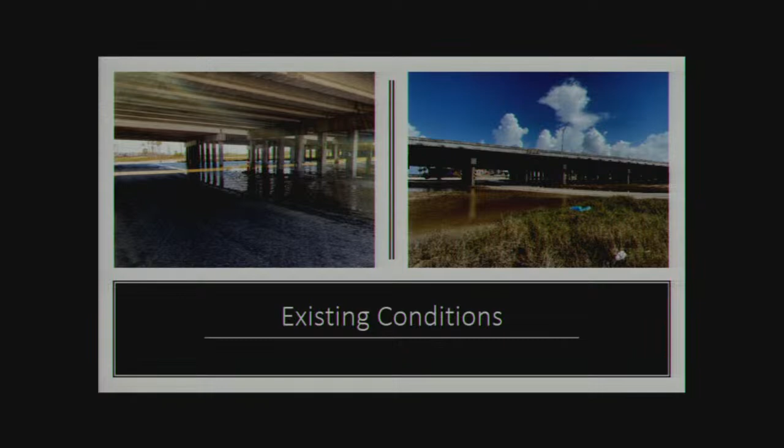While this is a TxDOT project, the city's Public Works Department is monitoring it closely. We're in touch with TxDOT because we want to make sure they get it done soon, given this long outstanding condition.

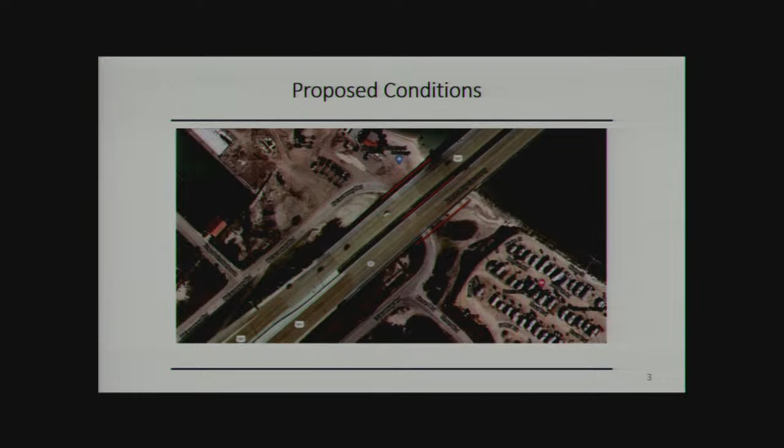Now, right across that roadway is what we all know as La Vista, well, Lighthouse Point is the new name. It's a $25 million multifamily community, and we're going to show some video here while I talk through this.

There'll be 159 luxury apartments there. Many are already built, and some are actually filled with tenants at this point. There are 8 townhomes, a marina, a restaurant, a chapel, and a banquet hall, and the signature Fraser Lighthouse that will be a landmark entrance into our city.

That footage is pretty phenomenal. Lynn Fraser has taken this drone footage through the construction period, but you can see the project is nearing completion. It started in July 2019, and it'll be done by June of this year.

It's a $25 million project, and the lighthouse we may see a little footage of here was funded by the city at a cost of $625,000 from Type B funds. The lighthouse is going to be 135 feet tall from sea level, constructed from nearly 2,000 tons of stone sourced from Granbury, Texas. That height of 135 feet will make it the tallest lighthouse in Texas and the tallest stone lighthouse in the United States. So we're going to have some signature highlights with that lighthouse.

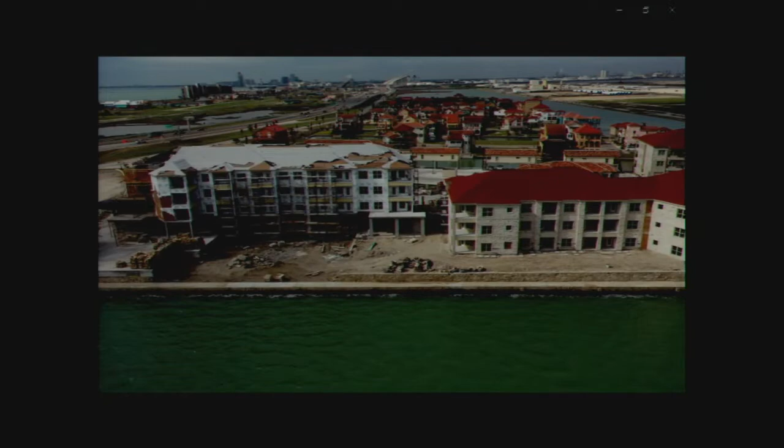50 apartments have been completed so far on this development, and residents have begun to move into the complex. Earlier this month, Councilman Lerma and several other council members were there to see the progress of the lighthouse, along with several other members of the community.

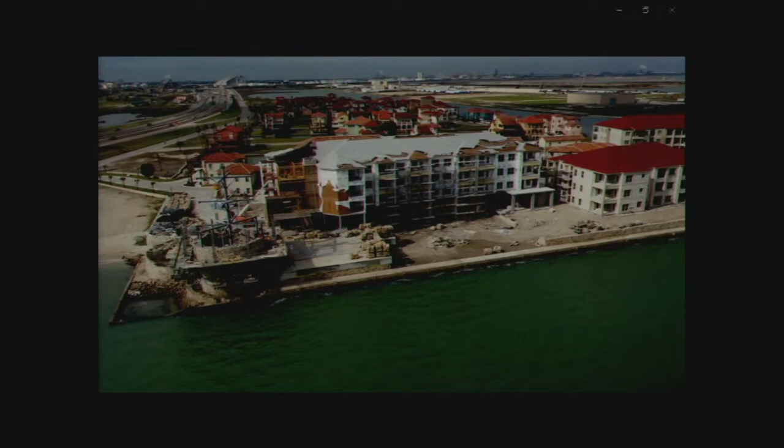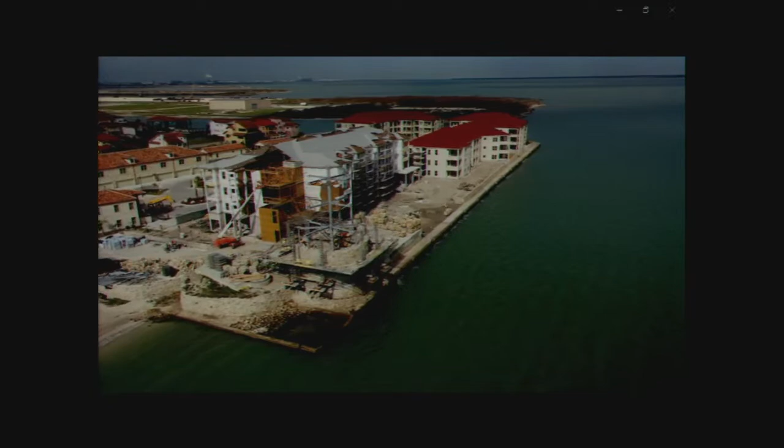We're going to transition now a little further north on the peninsula, close to the Texas State Aquarium, to talk about the North Beach restroom, parking, and playground facility. This is a $2.5 million project that the voters approved as part of the 2020 bond program, and we have some slides to show.

About 2 years ago, they were boarded up and pretty much shut down. We put some minimal investment in there, knowing we'd have an item in the bond program, to have running water and appropriate commodes and so on. With the new paint job and everything, they're okay for the next year until the new one is built.

They'll be demolished. One issue is that when you come in either way, the first thing you see is the restroom instead of the beach. We want to be able to see the beach and the ocean. So part of the program includes demolishing these 2 restrooms and building a brand new one that will be elevated to meet the velocity zone.

Also here is a playground, and we're going to show you a design schematic of how we want to bring that closer to the beach. So you have kind of a 2-for-1: families can enjoy the beach, but they could also get off the beach slightly and enjoy a playground with picnic tables and barbecue pits. The restrooms will be right here.

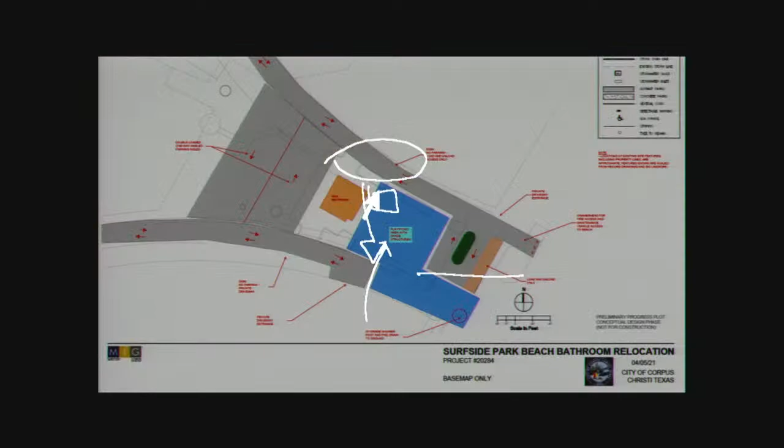We're going to show you the next slide. This is tentative, and we've worked with Carrie Myers and the North Beach Neighborhood Association. It's not finalized, but it does include input from Carrie, Neiman Young, and myself. I spent over an hour with Carrie on site a couple of weeks ago, and we've been sending her various schematics as we've evolved them, so she can share them with the community.

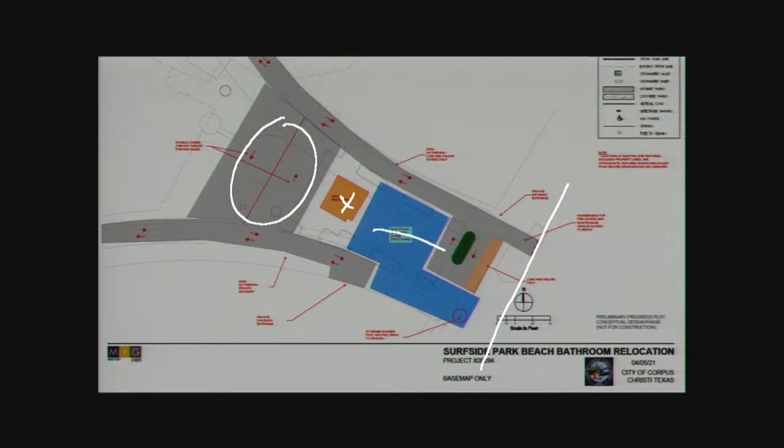You can see this is the beach over here, and the new restroom location would be here, with new parking up here, away from pedestrian activity, so people feel safe walking from the playground to the beach. The blue area would be the playground—we'd take it from where it is today and move it here so you have access to the beach and can use the playground and/or the beach almost simultaneously or one after the other. This is the new restroom location—not on the beach, but not too far away either.

You'd have both roads remain open with 2-way traffic, and down here, persons could drop off individuals—maybe young children or people with disabilities—and then progress back out to the parking lot. So that's the current schematic. I don't know if there's another slide on that one.

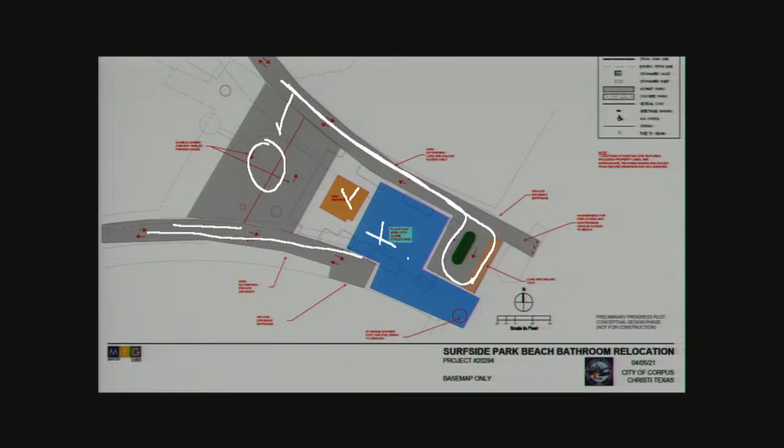Here's the design of the new restroom facility, and Carrie and the community, as well as the city, are happy with it. You can see it's elevated. The bottom level will have the required velocity zone breakaway material, but it will be closed up, so there won't be a place for hanging out, vagrants, or snakes.

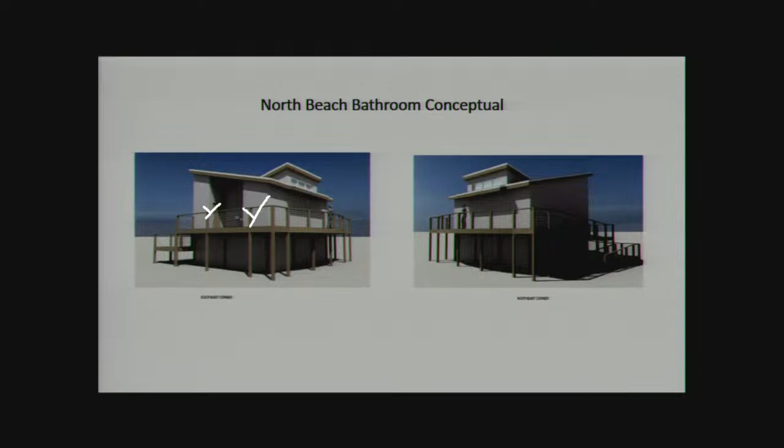Here are the doors for the men and women's restroom. It's an open floor plan, which is something the community wanted. Today, restrooms have individual stalls with a private door, and that can lead to some behavior that we don't want on North Beach or anywhere.

So the floor plan includes an open layout with stalls and sinks. Our design firm, MIG, which has national experience, is recommending context-sensitive materials rather than traditional plastic playground equipment. These are just examples of what's contextually relevant.

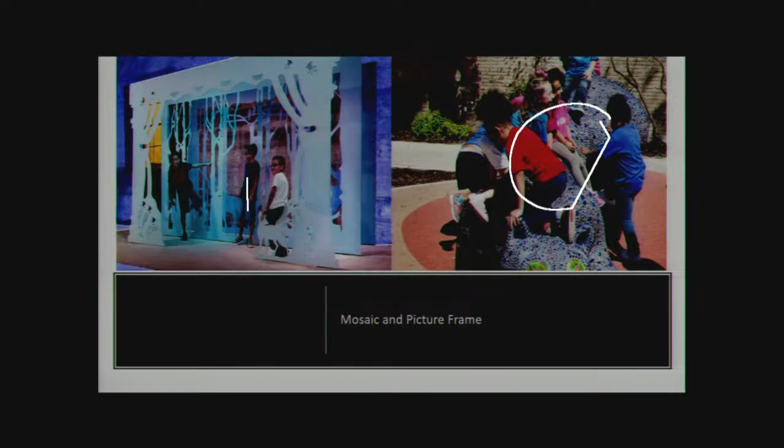This is an example of what could be there to let children use their imagination and play while they're on the beach. The playground would have seating and barbecue pits as well, offering a nice addition to what's there today.

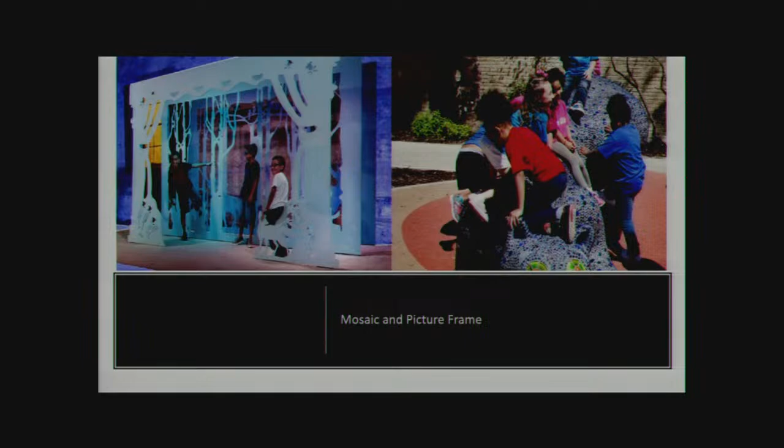This Friday, Neiman is going to meet with Carrie Meyer to show the final design sketch we have to date, and hopefully we'll reach a conclusion. Then we'll have MIG finalize their pre-design. We brought this firm on early to fast-track this project, which isn't unusual lately—we're trying to get things done as quick as we can.

MIG is doing preliminary design. Once they're done with their final design work, we'll do a design bid for this item. We expect to advertise for the design bid in mid-May of this year, and hopefully the facility will be done probably within the next year. It's not that big of a project.

So those are 4 projects: the drainage solution we're working on at North Beach, the 181 turnaround drainage solution; an update on the multifamily community coming up, the $25 million community; and the restroom and parking lot, which is the 4th item. We're going to have Tom Schmidt finish out the update on North Beach and talk about the progress of the Texas State Aquarium.

But before he speaks, I'd like Councilman Lerma to say a few words. He and I spoke yesterday, and he said let me have you close out my portion before Tom Schmidt comes up to talk. So, Councilman Lerma.

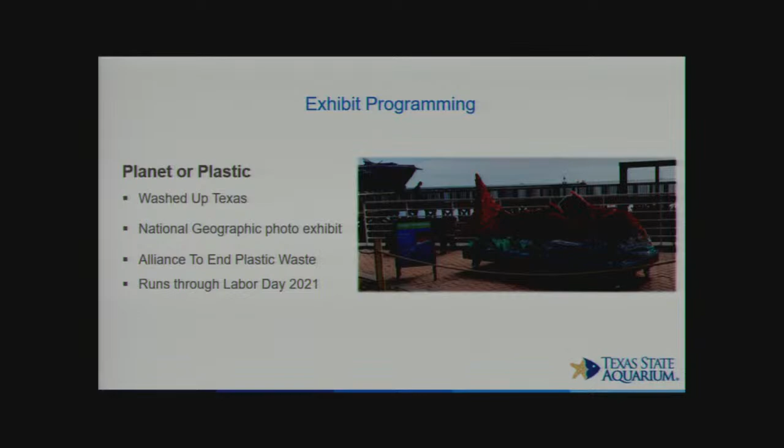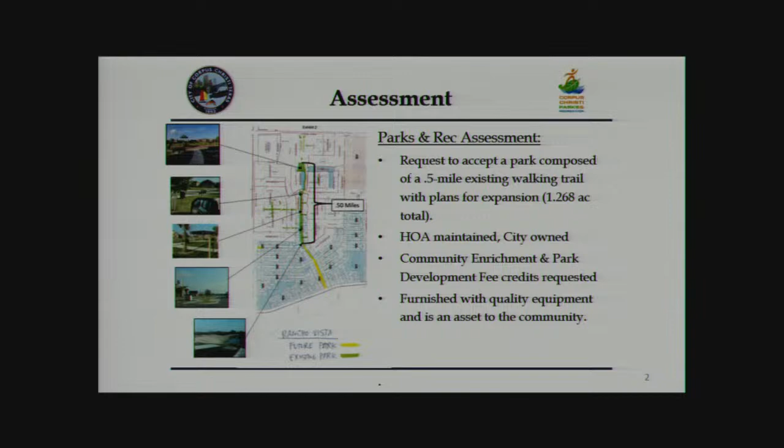As you can see here, this area has a playground, seating area, and a bike rack.

It also has a covered seating area next to this pond. Here's a picture of the walking trail.

They have some really nice dog stations, some bulb outs for parking, so all can access this park. And here are some more seating areas along the route and some trash cans.

In summary, staff recommends approval of this agreement. I stand by for any questions.

I'd also like to point out the developers here with us today. Oh, there he is, on this side, right, if you have any specific questions about the development. Mr. Hernandez, do you have a question? Okay, Councilman Hernandez.

This was part of our tour on Friday, along with yourself and Mr. Young, and I also had a conversation with Mr. Brazelton about this via text. So I want to bring up, as well as with Al Raymond, one of those things I just want to make sure is clear.

The trail, the park we're talking about is fine, where they have the playground equipment, no issues there. But the part with the walking trail, I recall this was done in lieu of, or in conjunction with, the fact that there's no other sidewalks on either side of that median, or there's no streets. So I don't necessarily have a problem with how this is done, because it's done really nicely.

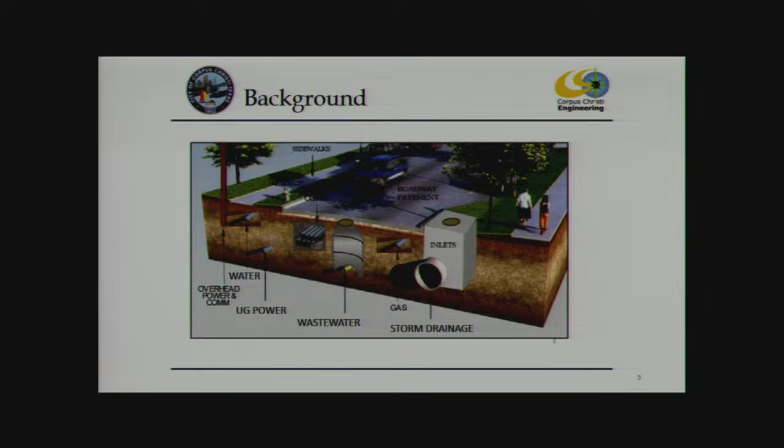You've got duct banks that carry conduit, conduits and duct banks for underground power, water, wastewater. Storm drainage is probably the largest piece of that infrastructure. You've got poles that have overhead utilities. And even with the complexity shown in this cross-section, there's a lot more you don't see because we're not illustrating the laterals that come from these utilities to serve the adjoining homes and businesses.

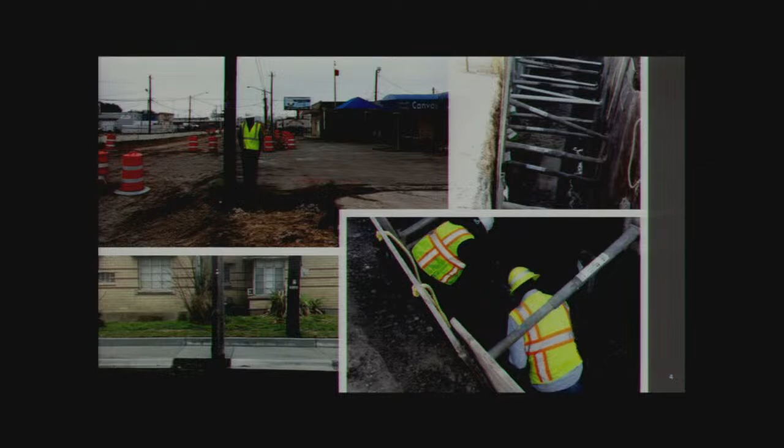These are some photos from recent construction projects that illustrate some of the problems we encounter. That first photo is one of our inspectors standing next to a utility pole that is in the alignment of the roadway and has to be relocated before we can complete the roadway. The guys in the trenches are working on a communication duct bank. The bottom left photo shows another utility pole that is in conflict with the location of the curb and gutter.

So we make a significant attempt to coordinate with these private utility companies. We distribute plans and specifications to them at every step of the design development process. We host quarterly coordination meetings to review upcoming projects and hear any issues they have. We also spend significant amounts of money to do subsurface utility engineering, where we try to get accurate XYZ locations on all of their utilities in the right-of-way and attempt to deconflict it at the design phase.

Our current ordinance also requires them to review and stay current on our capital improvement program. I'd say some of their efforts leave a little bit to be desired in that regard.

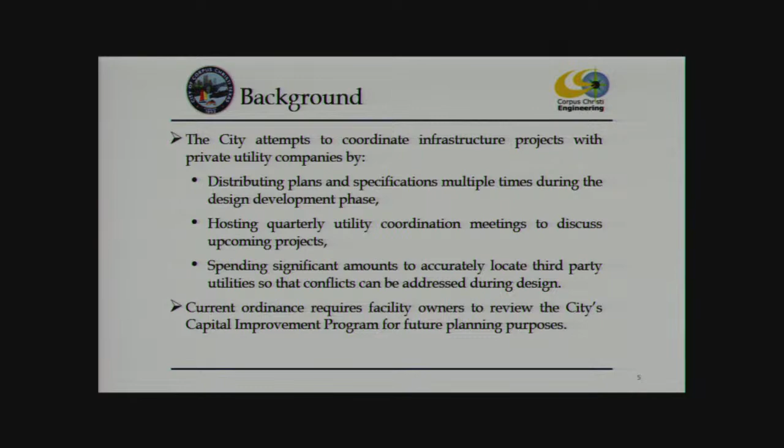So these are the problems we've experienced in recent years. Sometimes we send communication to somebody with the utility company, and they come up when we're getting ready to start construction or digging into their utility, and they say, oh, you've been sending all that stuff to the wrong person. I think it's their responsibility to maintain point of contact with us. But we've heard that a lot. We have design review meetings where they don't show up, which is fine, it's not mandatory, but if you're not engaging in the process, I'm expecting not to have problems downstream.

Sometimes we turn in these locate tickets—we do it during the design phase and during construction. That's the 811 call, which signals utilities that something is going to happen in a certain geographical area, and they have a responsibility to go out there and mark their facilities. That doesn't always occur. If you don't identify them during the design phase, it increases the likelihood that you'll have a conflict in the design that manifests itself during construction.

Utility relocation projects are not always programmed to coincide with our project schedule. We've heard utilities say, oh, that's not in our budget, we'll have to get to this next quarter or next fiscal year.

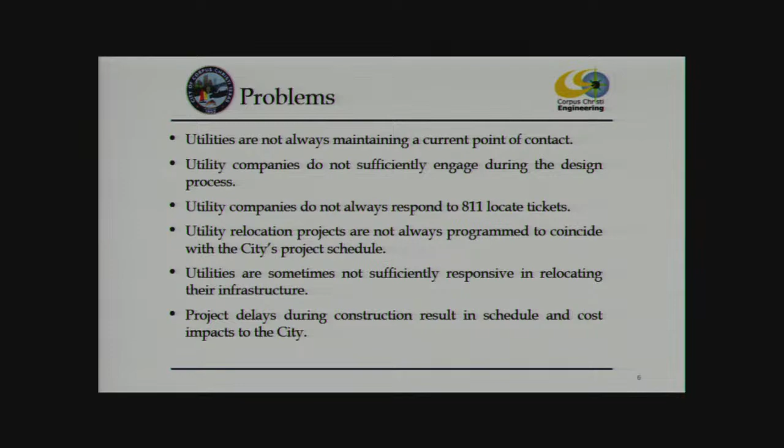As Jeff said, the purpose of the ordinance is to address some of these issues we're seeing during construction and design of our right-of-way projects. The ordinance requires the utility owners, the facility owners, to keep their contact information current with the city and to submit a schedule. So it amends section 49-43 of our existing code, requiring owners to relocate in a timely manner and submit a schedule to us. The new Article 8 puts timelines in place, setting expectations for the facility owners and the city on what the responsibilities of each party will be.

During the design phase, we notify facility owners at 30, 60, and 90 percent intervals of the design submissions, specs, and plans we get from our design engineer. We immediately send those to the facility owners so they can identify conflicts and let us know. If during the design process a conflict is discovered that cannot be designed around, or that we have not been requested to design around, we send notice to the facility owner.

They have 45 days at that point to submit a schedule to us, and then 120 days to relocate their facility. If after award of the construction contract the conflict is discovered, they have 5 days to submit a relocation schedule and 30 days to complete relocation.

The current ordinance, section 49-43, already has the penalty in there that's covered in 1-6 of our city code for penalties for unlawful behavior. What we did in this ordinance was consolidate it all into section 49-111 to make it easier to prosecute and to put the facility owners on notice so they don't have to go looking throughout the code and the Texas Penal Code to find the penalties. It's all right here in one section of the ordinance.

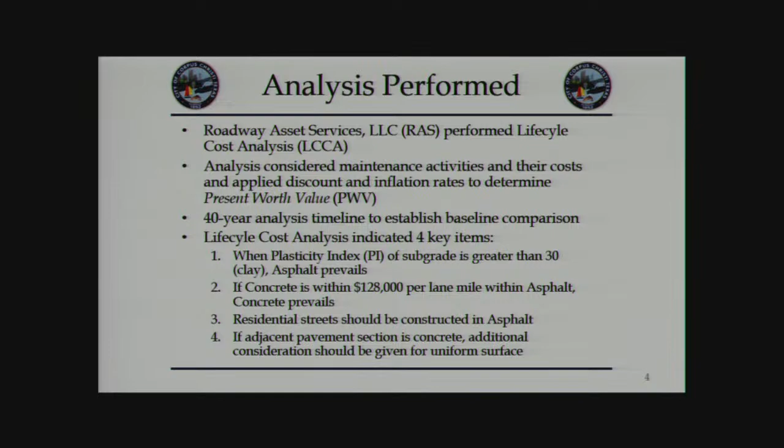But when we looked at both asphalt and concrete in non-expansive soils, the difference was $128,000. That's the difference you come up with in your life cycle cost analysis. And that's the reason why we gave you the $128,000 to look at as a benefit analysis when you're picking concrete versus asphalt. Now, this is non-expansive soils.

Now let's move over and go to expansive soils. Next slide, please. Again, soil characteristics — I'll tell a little bit about this. When you're doing repairs on non-expansive soils, it's less type of repairs. You're looking at cracks and joint sealings, so the time it takes for you to do those is less.

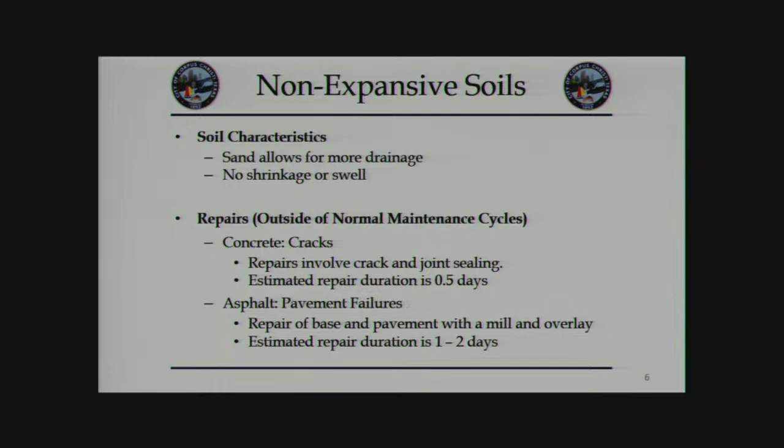It's not that much of an issue with our public when we're doing these type of maintenance techniques. And then when you're looking at pavement failures, you're usually looking at mill and overlays for asphalt streets. Next slide.

Application rates are the same as you come through. You may have to do some heavier work — in concrete, we added more concrete panel replacements, that type of thing, because it's moving more in expansive soils. But the difference was only $18,000 between the two on expansive soils. So taking a look at that for your life cycle benefit analysis, they're about a wash on heavy clays if they're designed properly.

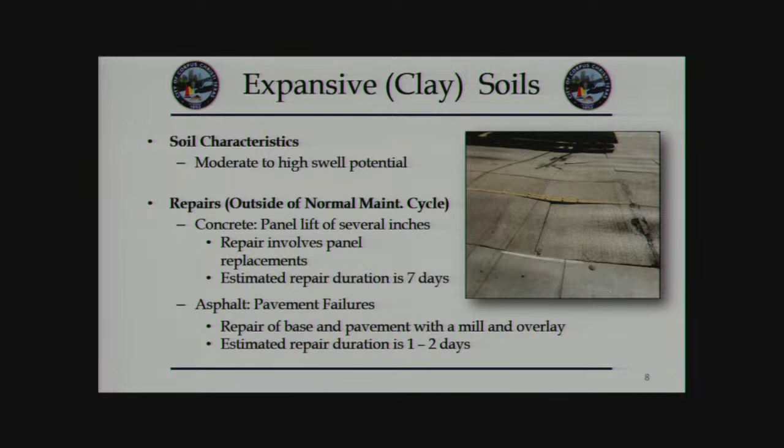Plus the bonds handling Waldron, and any streets that go forward, we'll look into how our budget works as new streets are added onto the program for concrete. But in this case, it's more invasive, more intrusive, so longer time than when you pull a panel out and put it back in, versus a mill and overlay, which is 1 or 2 days. So you've got to look at those maintenance issues as well. Concrete's great if you put it in the right spot.

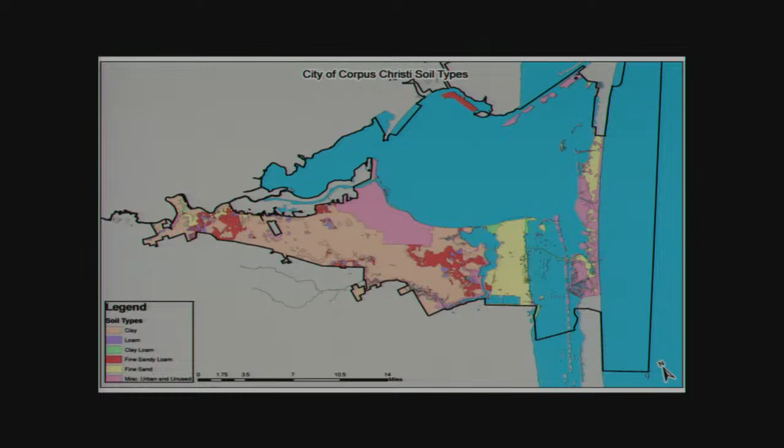Next slide, please. Here's a map of the soils. The soils in the light peach are what you have to watch out for. If you look at the majority of everything that's not on the island and not on Flour Bluff, it's high clay soils and high PI soils. So we have to make sure that when we're doing the geotech on our capital projects, that's being evaluated as you go through, because we don't want to put something down in an application that's not going to last or return on investment of our citizens' dollars.

Next slide. So key additional items. On residential streets, why did we go against it, why did we say no? It's not financially beneficial on the recapitalization cost when you're looking at concrete versus asphalt based on traffic loads in the area. And then there's higher costs when you come with utility cuts. Most of the utility cuts are in residential areas, and our utilities are under our roads.

In some cities with a predominantly 100% amount of concrete, those utilities are moved to the parkway so you don't have that disruption in your roadway. But all our streets, all our utilities are in the middle. So if it comes back through, they're going to have to cut back in. If there's a new house being built, they've got to cut back in. And when you cut a panel, you weaken a panel if you don't put that back properly. So we feel asphalt should continue to go forward in residential areas.

And then the last recommendation was pavement continuity. So for us, if you build a section of roadway like we just did with Staples, and then you go back to asphalt again, it just didn't make sense. I'll talk a little bit about that when we tell you about how the bids went. But for us, that's an idea - even if it's over the 125, as long as it's within a certain range, it makes sense to continue with concrete if you've already built one with concrete.

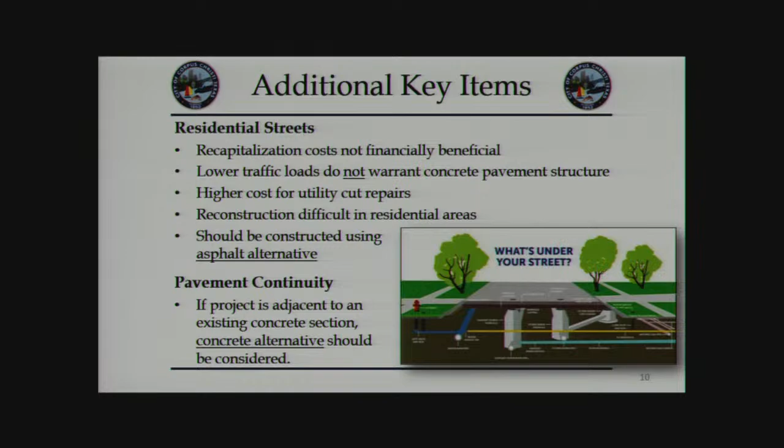Next slide, please. So the final recommendations were, again, geotechnical conditions are important - plasticity indexes greater than 30 should not consider concrete. The cost differential was important, so our recommendation to you all as a council was to stay at 125, because at 128 you could still consider a little more if you wanted to do that continuity or some other factor. So 125 was just a baseline, but you still had some opportunities to consider that.

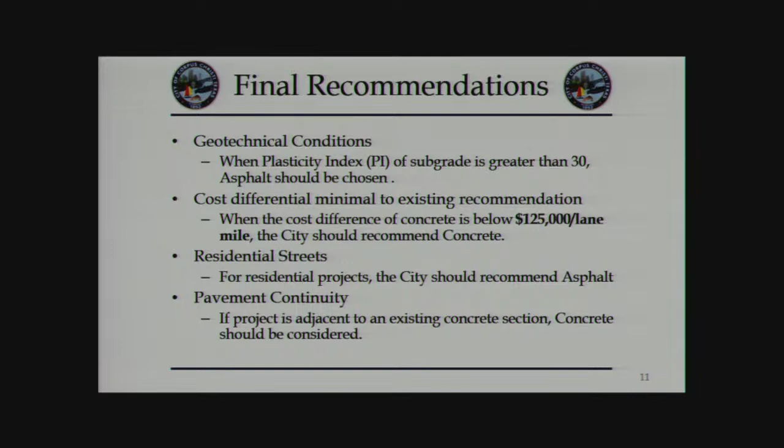Residential streets were not recommended, and pavement continuity was that recommendation. So I want to tell you a little bit about how that's been working over the last six months.

It's probably what you want to know. So there have been 10 contracts that have come up before you, and 2 of them made sense to look at in both directions.

One was Staples Street from Baldwin to Kostoryz. When it came up, it was bid both ways, and it was a little higher than 125, in the 130 range. But because of the continuity of that first large section built with concrete, our recommendation to council was to continue the next phase with concrete. That was the way it was approved with this council, so that moved forward utilizing this policy.

So those two were the major ones that went. There were other arterial collectors, but there were like six points, intersections, which were smaller pieces. And then you passed the 2020 bond streets to go forward to get design.

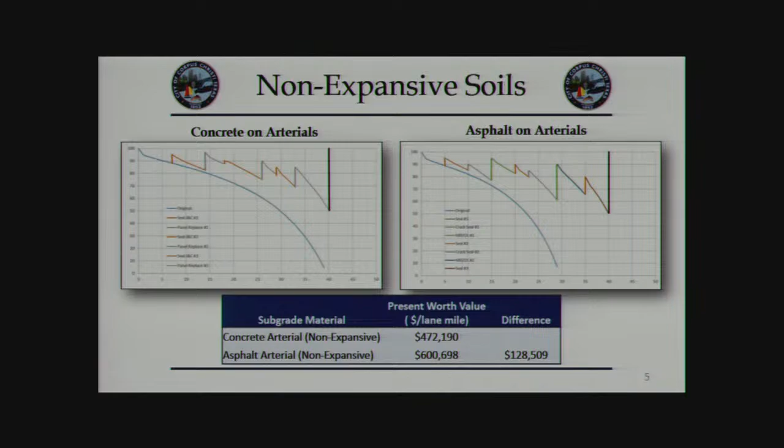Okay, can we go to the expansive one now? I want to make sure. Sure, so for expansive, remember what I said, it actually lowered a bit because when you do expansive soils, you have a different deterioration curve. So the concrete is now 35 versus 40 years, and then the asphalt is 25 versus 30 years.

So I kept looking at these, I know you and I met about this, and I kept thinking this can't be right. I don't understand how, you're correct. My apologies if you guys received something that's not my presentation today. Is mine the only one showing that way? No, you're correct, I think they flipped the graphs. Okay, that's all I had, I just wanted to make sure I was on the right page. Thank you. Councilman Hunter.

No, it does not, because this says that it can make it to 40 years if you do proper maintenance. Okay, probably won't have an answer, but just a quick question: what would the price differential be for a 40-year concrete street versus a 30-year asphalt street plus reconstruction of the street and 10 years of maintenance?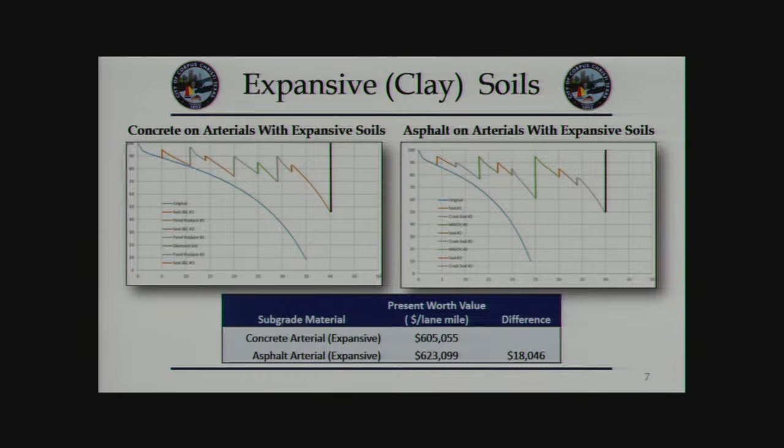I think I do, Councilman, but then again, the life cycle cost - because we feel that we're maintaining the street. If you don't maintain it, I think your point is completely valid, as was happening prior to that. But since we're maintaining it, we're going to be putting it out so that it matches what a 40-year concrete street would be. That's what I'm asking. Okay, yeah, thank you, I appreciate it. Sorry, I didn't understand that earlier. Thank you.

Mr. Lerma. Thank you, Mayor. Councilman Lerma, sorry.

Richard, you and I have talked about street maintenance when we toured District 1. Yes, sir. And we talked about base on asphalt, okay? And you and I discussed that if we increase the base, that would give you longevity of the asphalt. At any point, are we going to be doing that? Do we need to change our policy? Right now we have a minimum standard of a base when a street goes in.

And you and I discussed that there's different standards of base - minimal standards, you got the medium, or the high end. And I know that's a cost increase. But to the city and the citizens, is it worth going up to that next level and increasing the base? And if we do that, is that going to give our asphalt streets an extra 10, 15 years? It makes sense to spend the money now, and our streets last a lot longer, especially if you're going to maintain them the proper way.